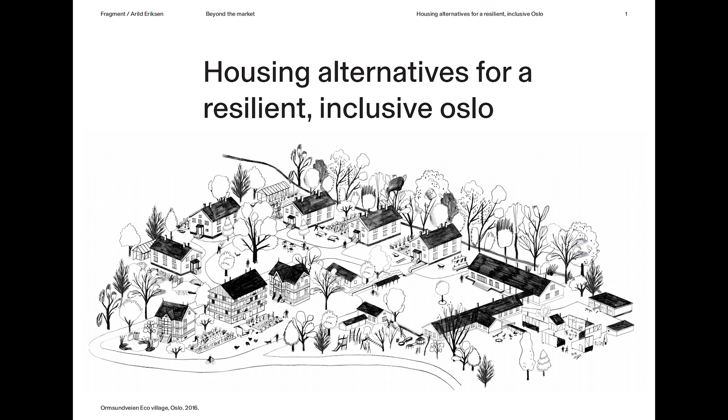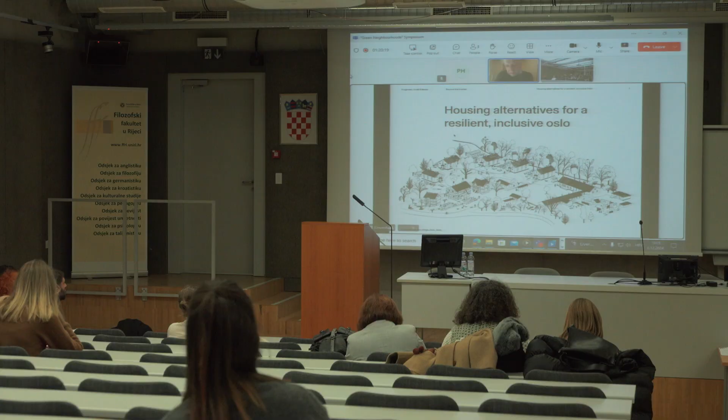Thank you. Like you said in the introduction, I'm going to talk a bit about the little we have of housing alternatives in Oslo, which is not so much, but the nice thing is that it is a rising ecosystem of people who want to do other things. And because the market is so limited, there are a lot of people who actually work quite hard to make anything else happen. So it's okay if you stop me if there's anything unclear on the way, but I will just go through these different project examples and then we can talk a bit about it afterwards.

If you have seen any of my lectures before, then of course I always start with pointing out this idea that in Norway we don't have a village culture, that's something we have been taught. And we actually have a village culture and urban culture which dates many centuries back. But at the end of the 1800s, these structures were dissolved for many different reasons, mostly because of the farming and that they had a lot of different plots of land that were unsuitable for farming. And then this idea that Norwegians live in a small house each on their own hill started to grow. And we have been struggling with this idea because it also says that Norwegians can't have co-housing, they can't live close to each other, they can't share anything, and we want to combat it.

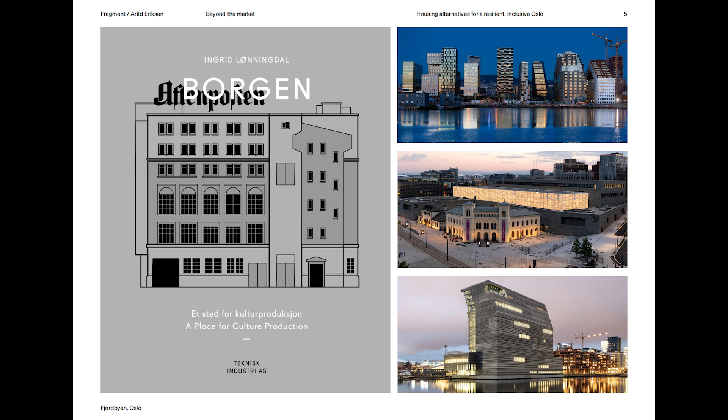And the development on the right is offices, it's also houses, and there's the Munch Museum and the National Museum, and it's ironic because artists need to start somewhere. And the funny thing here is that they build museums for appreciated art while the artists needed to move somewhere else, further outside of the city.

And the rest of the urban development in Oslo is quite criticized. It's quite monotonous, and it's built basically on the basis of what the real estate agent knows sold well last year, which is a simplification, but there's a lot of evidence that this is where the repetition comes from.

We've been working for many, many years to try to establish alternatives, and we've been looking, of course, at different Dutch, German, Swiss alternatives. And in all our projects the last years, we implement different versions of a structure that facilitates either self-building or smaller groups of developers, like groups of families who can develop housing.

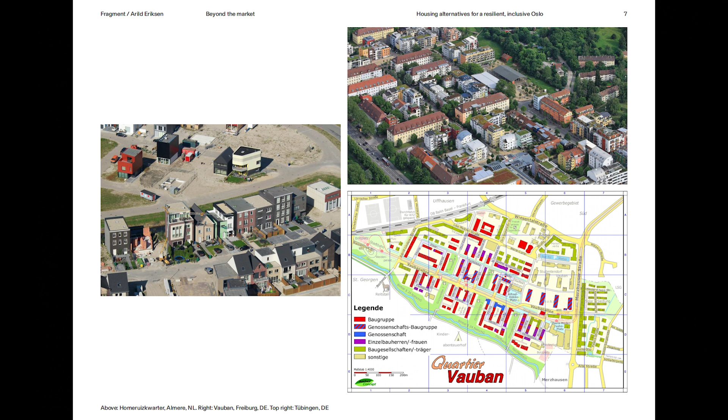And the image on the left is maybe not the most beautiful area I know of, but it's the Homeruskwartier in Almere in the Netherlands, where the municipality makes a structure and they put pipes in the ground, and you buy a plot at a fixed price and you build almost anything you like. And then the landscapers come and finalize the area. Now there is a lot more built than what you see here.

And then you have Vauban and Tübingen, which probably a lot of you know about, which is large-scale facilitation of Baugruppen, like co-builders who build together, maybe with a project manager appointed by the city and so on. And I always try to tell, when we meet developers and the municipality, that this has a lot of different opportunities.

It feels really unfamiliar to the Norwegian context. But at the same time, when you think about the self-builder team that I showed you earlier, you don't need to go that far back in history in Norway before people actually built a lot more themselves.

And these images are of the Zanderroth Architekten building in a housing area in Berlin where 144 families participated with Zanderroth to make a housing area where they decided a lot for themselves. And then you have smaller versions like Ritterstrasse 50 in Berlin, which was also partly self-built by the groups of families who moved in there.

And then, of course, you have the Bel Architekten project in the International Bauausstellung in Hamburg, called Grundbau und Siedler, which is the most extreme example. You buy a plot on that kind of building you see on the bottom left, and then you get materials and you finalize your own flat using a manual that Bel Architekten made as well.

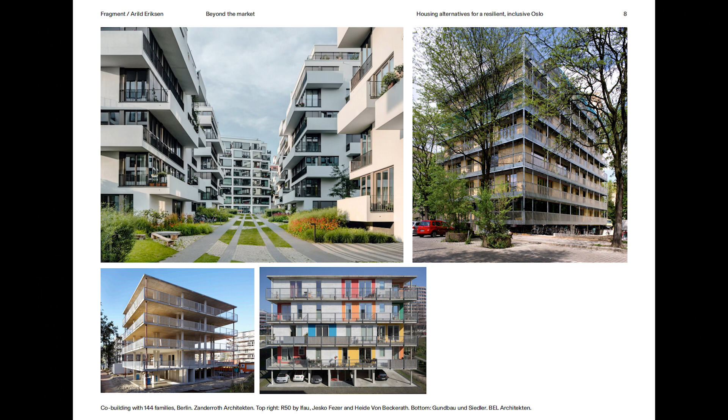So these are the two: the residential planning of whole housing areas, like Freiburg and Tübingen, and then the building version, where you can actually make a scaffolding and then you build a building. And we were always quite inspired by Habraken, even all the way back when I was studying at the Bergen School of Architecture on the west coast of Norway.

And related to what Peter mentioned recently, of course, if you want to reuse and make buildings last longer, then you need to plan the buildings to separate the different parts, so you can change parts that are broken or parts that need to be adapted to new uses as well. And the Habraken model is that you have a plot and you put a house on the plot, and then you put a flat in the house, and then you put the interiors in the flat.

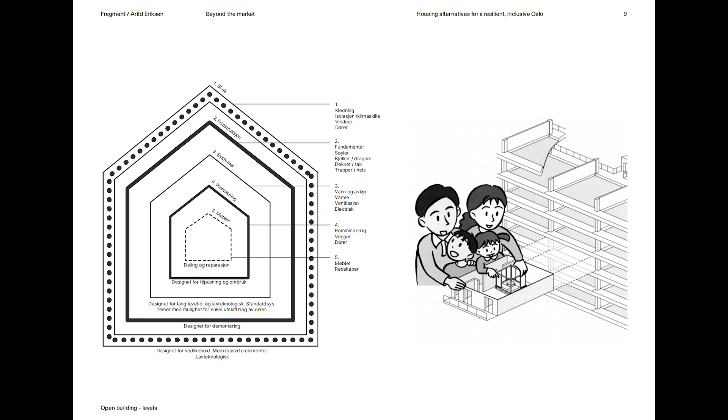And he always talked about how everything is sort of based on different levels of interaction. And the picture on the left is approximately the same, that you have a building where you try to separate every part of the building: you have the system, which is the scaffold and the vertical shafts, then you have the modules for the facade, then you have the cladding, and then you have the infrastructure inside as well. Which is also very nice, because this is not only a sustainable building model where you can change everything.

It's also a way to make a structure of a building that people can participate in creating and changing over time. I was recently in Munich, and I visited a project called San Riemo, which is approximately a building like this. And after just 2 years, they had exchanged interior spaces 3 times already. It means you have one too many rooms, then you talk to your neighbors, then you go to the cooperative and they order an acoustic firewall between two flats instead, and you pay a bit less and your neighbor pays a bit more.

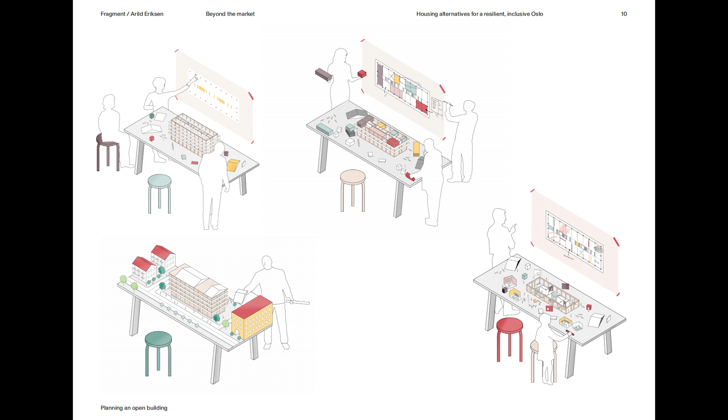So I think in Norway this feels really crazy and really strange. But if you travel around in Europe, it happens in very ordinary buildings and also in very innovative buildings as well. So the Young Artists Society got in touch with us and asked us to make a new concept for artist housing in Oslo that combined affordable housing with artist ateliers close by.

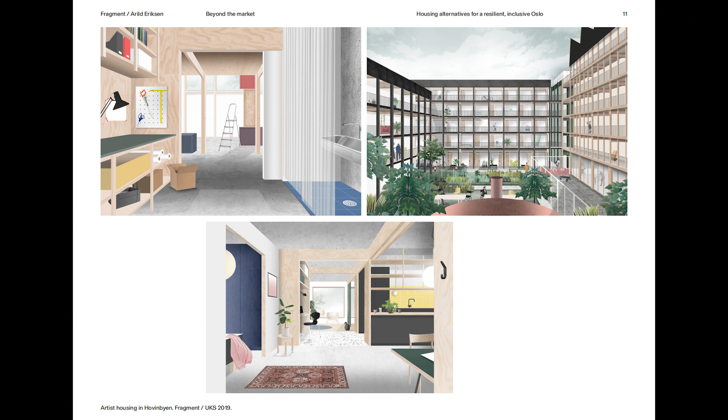I'm not going to talk so much about the first project. This was financed by the municipal arts body. I don't necessarily know what that's called, but it's the body of the municipality that facilitates artist production and artist ateliers. And we made an open building where there was a lot of self-building, and an open floor plan where we included production spaces, community workshops, and so on. And then we made a model for both flexible houses and flexible workspaces in the rest of the building.

At that time, we started a project called Cirtre Framework, Rammeverk, which was about creating an open building in wood that should be able to change over time, with resident participation, and able to include circular wooden products. This was a Norwegian Research Council project, and the same research consortium made circular walls and new decks between the floors of reused wood. We had the Norwegian standardization office taking part as well. It was a massive research project with many different actors taking part.

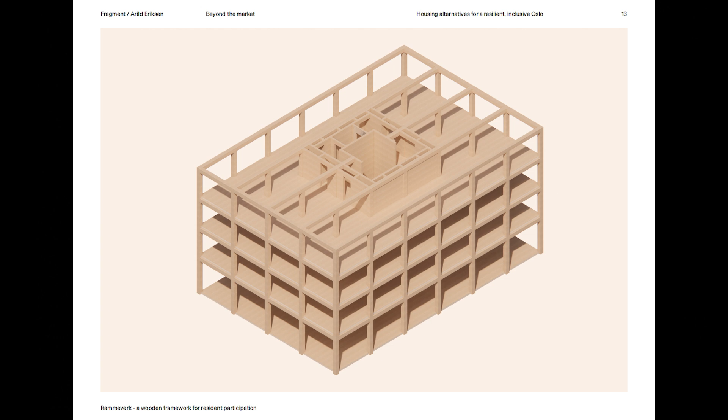We made a more elaborate and researched version of an open building. This is a construction model from the engineers called Degree of Freedom. They made a really simple demountable wooden construction with centralized shafts and stairs and elevators. And this kind of structure with this kind of grid facilitated many different ways of making the building. The idea was that we made a building designed for reuse. It means that every element and module we create in this building should be able to be taken out and reused in another place as well.

I was educated in 2004, and that was the time when the most talked about architecture was Zaha Hadid and Delugan Meissl and all these architects who were making buildings where everything was unique and all the walls were tilting, and there was an increasing complexity of the building. It means the different layers and elements were increasingly complex. And now we see that if we're going to create housing alternatives with resident participation, we need to go back to modularity.

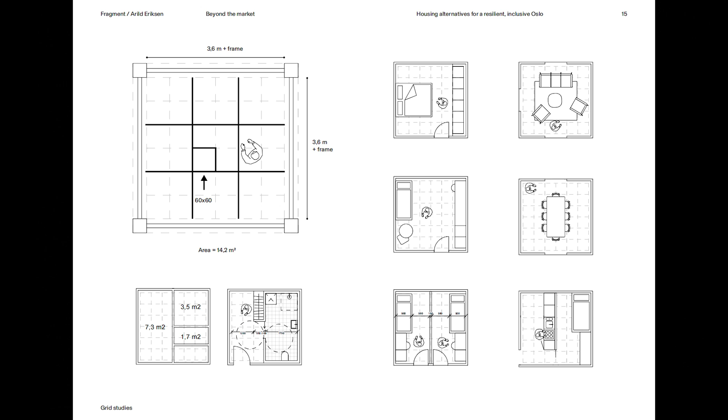We need to go back to this kind of good balance between a cost-effective building and maximum flexibility and participation in it as well. We used a really simple grid, which is based on different historical examples, which was possible to subdivide in different sizes. It was possible to include universal access. It was possible to include many different versions, even very small bedrooms in addition to larger bedrooms as well.

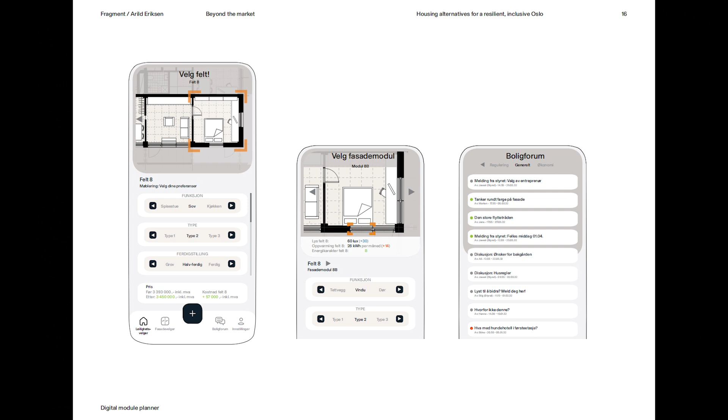And a part of this was that it was a user process. We had different user groups who took part in testing out different elements. So the building in itself is a very simple building, and the main part of the process was kind of a service design of how to create it together, how to choose, and what the choices were going to amount to as well.

And the variation of the interiors, of what you could actually do with this kind of building, because every kitchen and bathroom is going to connect to the different vertical shafts, and then you have different ways of entering the building as well. During this process, of course, we were also researching access balconies, different versions of this.

So this kind of idea of open building: in the Netherlands, there is an office called Marc Koehler Architects, and he has been building a vast number of open buildings of different kinds, but in concrete and steel as well. But I think for us, the main objective was to give perspectives of circular wood use as well.

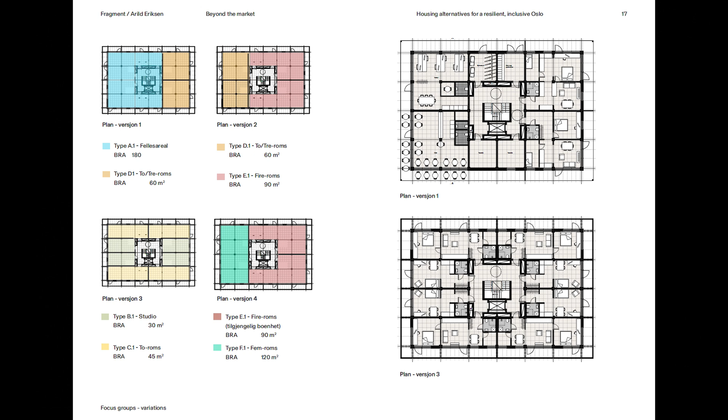And also, there's a very simple way that the resident can participate to give shape to the building: each resident can choose where they're going to place the windows in their flat, related to 20% of their floor area, which is a simple way of doing energy efficient housing planning as well.

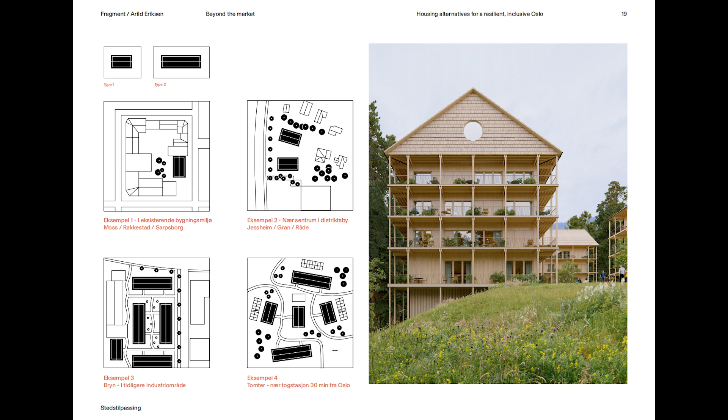And with this building, we are now in the middle of meeting different developers and different NGOs to plan for the first building models to hopefully be put up in different areas outside of Oslo and maybe in Oslo as well. And of course, we also envision it in different settings, with urban settings and country settings as well.

After doing this kind of circular building for resident participation, we started to work with this artist housing association again. I'm going to talk a bit about the mixed city afterwards. I think Oslo is similar to many towns in Europe and in the world, in that industry and production and repair is slowly pushed out of the city. It was like I showed earlier with the artist workspaces in the fjord city of Oslo. This is not only happening in the fjord city, it's happening everywhere else in Oslo as well.

And the Artist Association has been looking at different development areas to see if it's possible to include arts production in different areas as well.

Right now, I'm also in a work group with the Norwegian trade unions, something called LO, and a few other trade unions, because they have discovered that if you're a family of two trade workers and two children, you can only buy 0.8% of the houses in Oslo, which is not so much, and that means that all the trade workers slowly move out of the city, and we will have a city which is mostly houses and offices, which I think is quite critical for a city which is going to be a sustainable and mixed city as well. We were invited to include artist housing in the development area in Oslo.

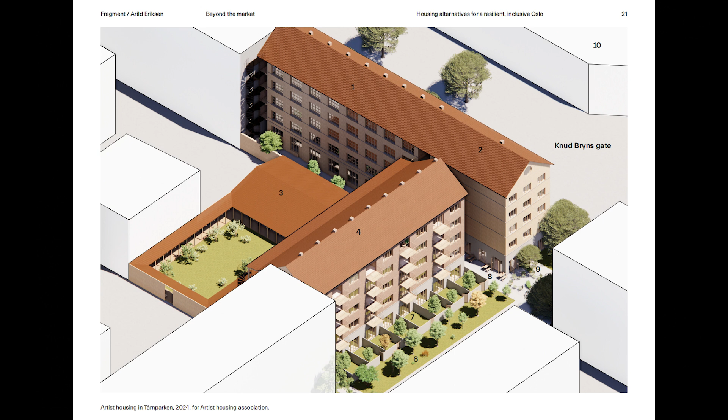I'm not going to talk really long about this project, but it just shows that in Norway we lack non-commercial housing development. If you go to Copenhagen or Vienna or Zurich or even London, you will find subsidized or non-commercial housing development, while in Oslo there is actually none of it. What we try to create is a housing developer. In this case, it develops houses for artists, but also a network of different developers for trade unions and others who want to create houses.

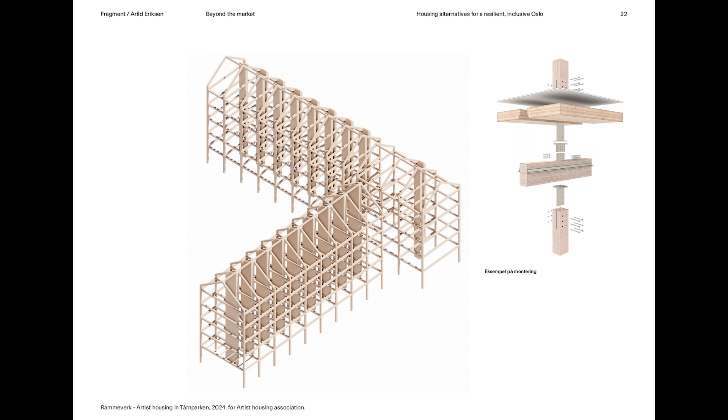You could also do that with just wooden plugs as well, if you want, then you need to remove the wooden plugs in another way. But the main idea here is that we create a grid. We base everything on modules from the building shop where we go to get building materials. You reduce the complexity of the outer walls, and then you connect bathrooms and kitchens to the vertical shafts.

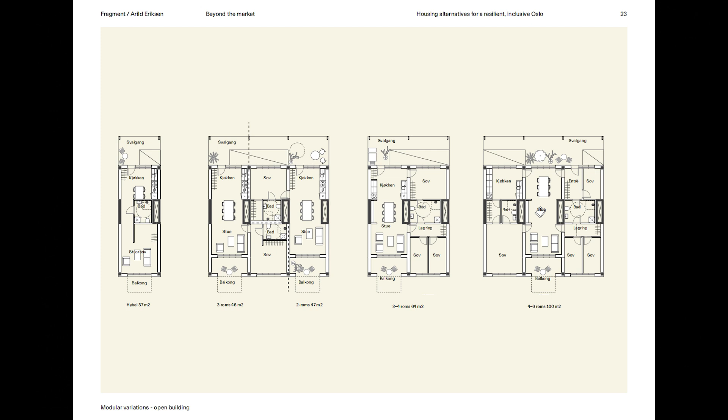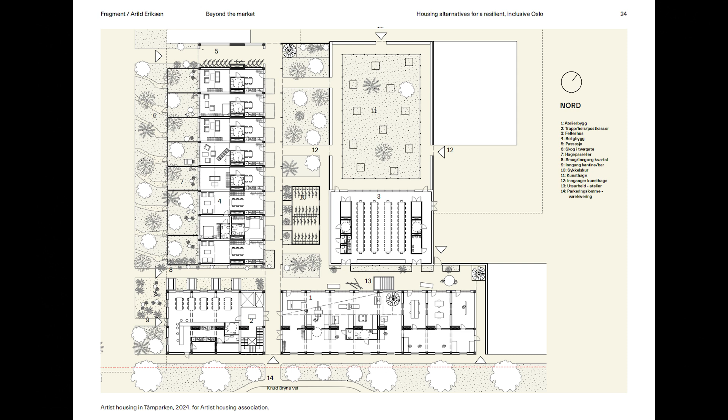In this instance, we have also included an outdoor access balcony, and we have also tried to open this city block with the artists to the surrounding neighborhood, with canteens, workshops, this kind of community building, because we also try to work a lot with co-housing features. Like Philip said, I'm working on a book for Birkhäuser, which is about co-housing, and we actually try to include co-housing in all the projects that we build. Not necessarily because we want to build small buildings, but we also want to make facilities that make it easier for people to meet their neighbors.

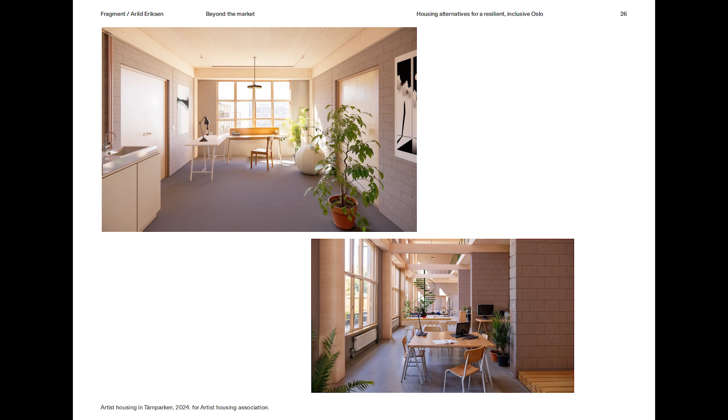Here are some illustrations of this: this is a canteen that is open to the artists in the workshop building, and it's also open to the neighborhood. And on the bottom image you can imagine a bit what we try to do when we're doing the open buildings, that we try to detach the service facilities like the electricity and the pipes, so it's possible to change it all the time. And there are the self-built workshops as well.

Lastly, I'm going to talk a bit about the Ormsundveien Eco Village, which is another side of what we and others try to do in Oslo, and also another story of how difficult it is to actually develop and envision alternative projects. The buildings you see in the image have been empty for like 25 years. Some years back, a group of squatters squatted the yellow building, and they got a deal with the municipality that they could become what they call an urban ecological test area. It means that you are going to have a lower consumption, refurbish the building yourself, and have plans for urban agriculture, waste management, water management, and different ideas.

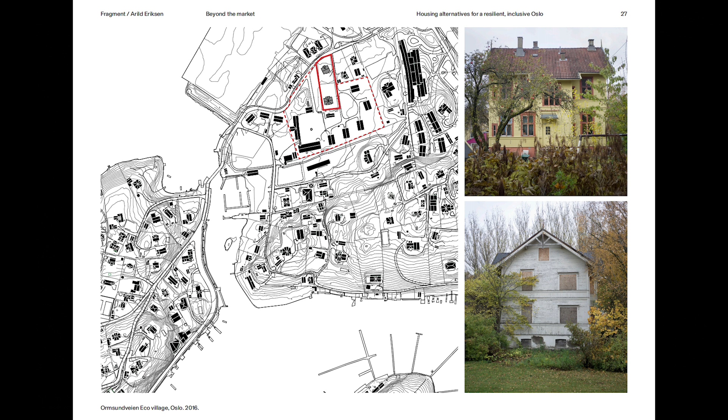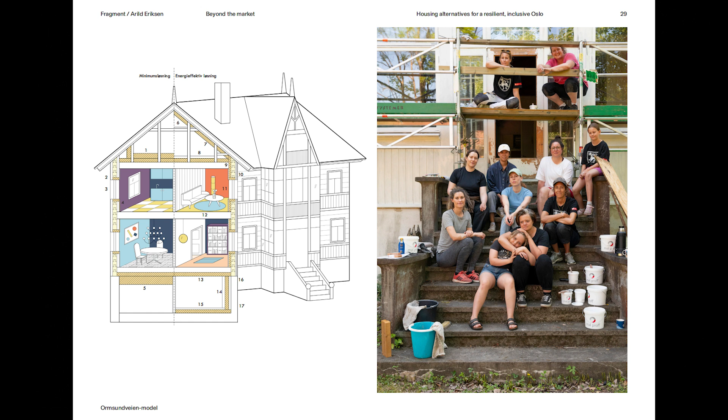They came to us and asked if we could envision this area and these two buildings, together with an old camp from the Second World War, as an urban ecological eco village where the residents should refurbish the buildings. We should do some test buildings to facilitate self-builders. And, like I indicate on the images on the bottom, there should be some co-housing features: places for people to meet, workshops, laundry rooms, which I'm sure you probably also have in Croatia. I'm trying to look a bit for that now when I write the book, so if you have good advice on that, I would appreciate it.

But in addition to that, a big part of this project has also been to make energy efficiency strategies for these old buildings, and to make different courses for the residents and others to take part in refurbishing the buildings. So we have arranged window refurbishing courses. We have had clay and lime plaster courses, light clay with straw courses as well, to try to facilitate it.

After a few years, we actually got the city council to vote for this project like 3 times. The city council said the eco village should take over the next building, and the municipality should make it possible. And years after, it still hasn't happened. We decided to keep on working on it, but at another scale. I worked with this a bit at the Oslo Architecture Triennale a few years back, and I wrote an article about how it should be possible to depart from a few existing buildings and create an urban ecological community based on that instead.

We got money to do another study project, and this is what you see here: the 2 existing buildings are the yellow on the left and the white on the right, and the other buildings are micro houses. It means they're 30 square meters.

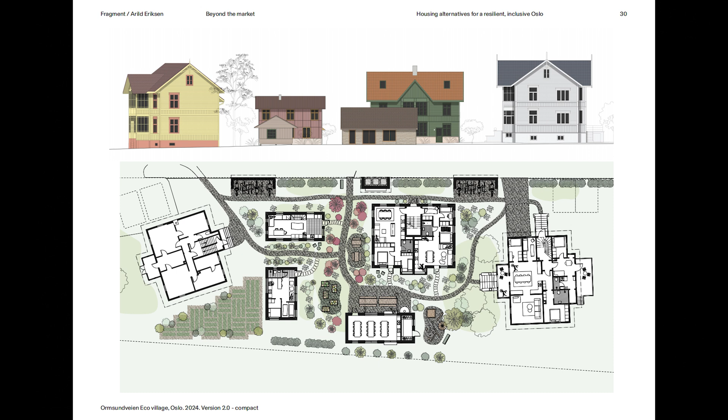That's the new Norwegian technical regulation for micro houses, which is a clay building. And then there's a small house, the pink one. And then there's the community house as well, which is also a rammed earth building. And then you have the green one, which is kind of an open building, but is sort of adjusted to the look of the neighboring buildings, which was a really clear recommendation from the municipality as well.

And this is interesting. I also think perhaps this is happening in all the other countries in Europe as well. There's really a new focus on building materials, especially bio-based building materials, which I think are very suitable for self-building. They can also be very short traveled as well. In this project, we have been working a bit on hempcrete, straw bale, clay plaster and rammed earth, mostly to facilitate user participation and self-building in these processes with element building, but also to give this eco village an innovative approach to new building materials as well.

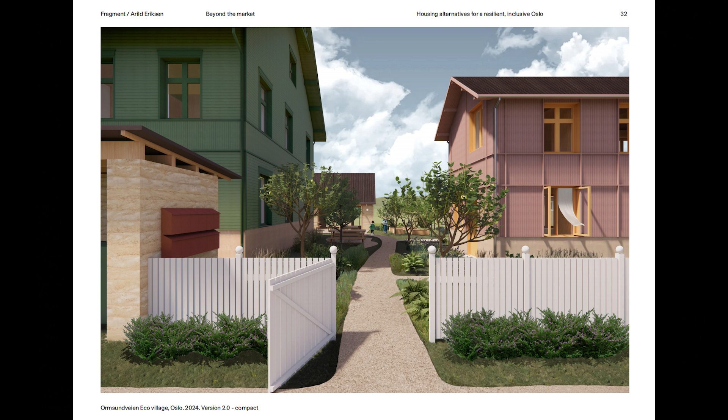This is how you enter this eco building. This is the small house. This is the community house in the end. And the nice thing about the building tradition of straw bale and rammed earth is that there's a lot of knowledge of building physics in Norway for this. But the communities that have been building like that have been marginalized for years and years, and now suddenly they are in the warmth again.

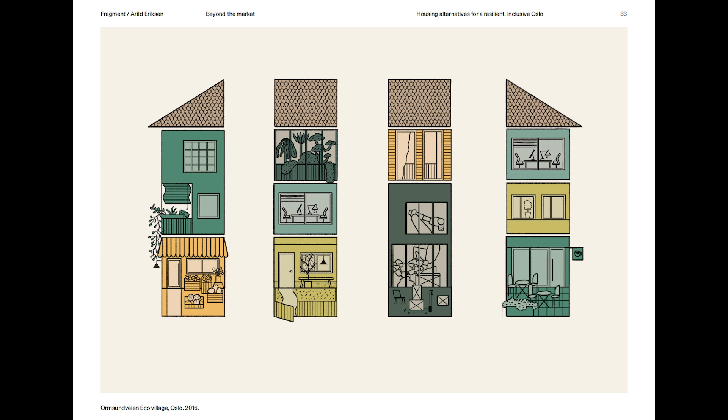I'm getting closer to the end now. I'm going to talk a bit about what I mean by a resilient city. I'm showing this image. It's a study we did for one of the few times we have worked for a major developer here in Oslo. We made a small housing area where we envisioned small houses together with workplaces. If you go to the countryside in Norway, there are a lot of single family houses with workspaces on the first floor. But in the Oslo city center, this is not built at all. Of course, it's because they build much larger in Oslo city center, but it's also because we lack different models of housing in Oslo.

If you go to Berlin, you can go 10 minutes by bus east of Warschauer Strasse, and you're still in the city center of Berlin. But they build large housing areas with just 2 or 3 stories. In Oslo, everything needs to be 6 or 7 or maybe 8 stories. And it's also kind of an ideology, I think. I'm going to jump a bit past that one. I think we need more of this resiliency, and to a much larger extent, we should plan with nature and productive nature in mind when we are planning cities.

My office is also running an app, of all things, a mapping of what you can eat in Oslo, with recipes, maps, different vegetables, and it's also campaigning to include edible city nature in development areas, both for preparing for war and catastrophe, but also because it's a really nice thing to have in a city as meeting places. At the same time, in Oslo in recent years there are school gardens, agriculture courses for children, teaching a new generation how to grow vegetables, how to plant a microforest, how to ferment a vegetable. I think that is a very important part.